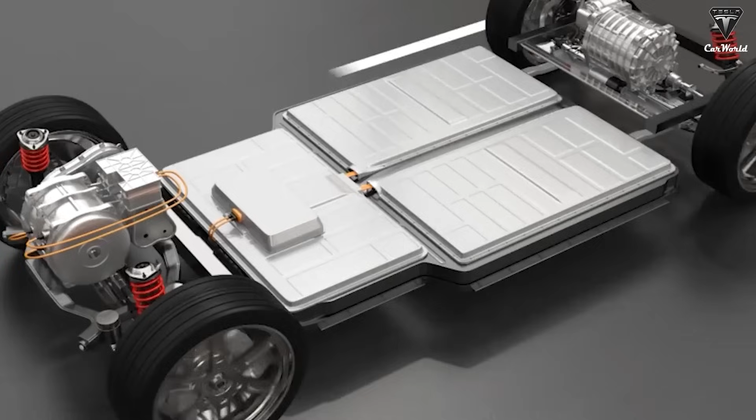While Toyota, Samsung, and Western giants quietly test their scaled-down battery technologies, Huawei has just played a wild card that sent shockwaves through the entire auto industry. A solid-state battery, potentially capable of delivering a jaw-dropping 1,968 miles, or 3,000 kilometers range for electric vehicles. This is no longer a competition between individual models or brands. This is a survival race.

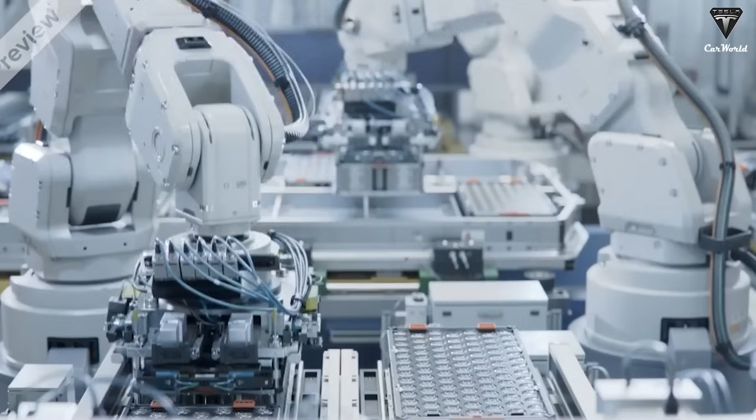If other automakers don't catch up with this technology within the next 2 to 3 years, they risk losing the market altogether. We're talking about batteries with twice the energy density of today's 4680 cells, a 5-minute charging capability, and a battery architecture that tackles the biggest flaw of solid-state tech: rapid degradation. And perhaps the most chilling part?

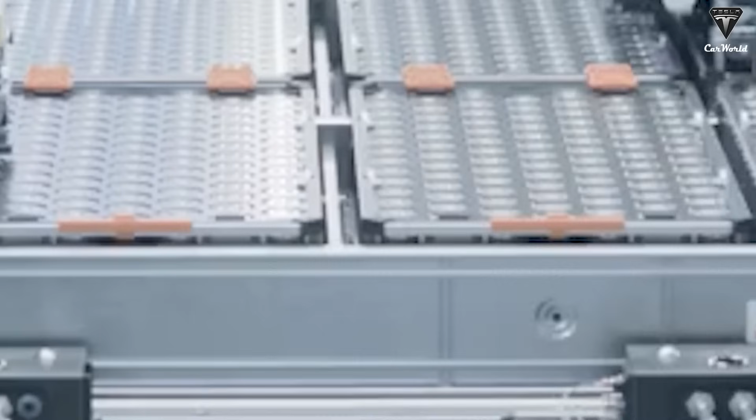Tesla is going all in on this front with a cold ambition, pushing past 1.3 million vehicles per year at its Shanghai Gigafactory. After all, Huawei is just one name among over 7,600 battery patents filed annually in China. And in the end, it's no longer about who leads on paper. It's about who can turn lab promises into mass production reality. The answer may well shape the entire future of transportation in the decade ahead, and you need to know about it now.

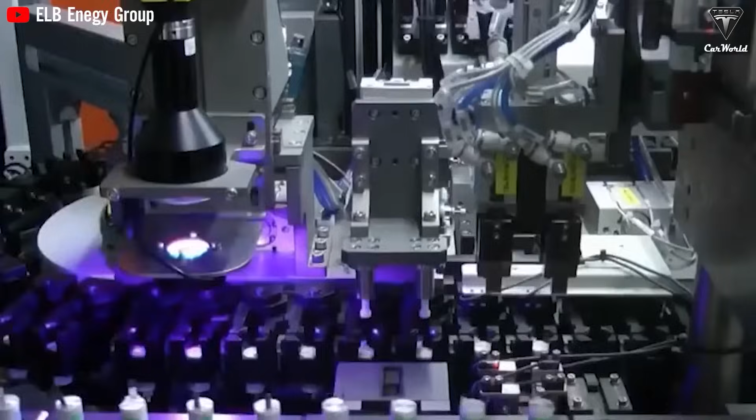How does a 1,968-mile battery truly lead the pack? Is it for real, or are they just blowing smoke? Let's be real, nobody saw this coming from Huawei. We mean, this is the phone company we all know, the one always in the headlines for clashing with Western governments. They're not a car maker, and they've never been a big name in EV batteries either. But out of nowhere, they drop a bombshell.

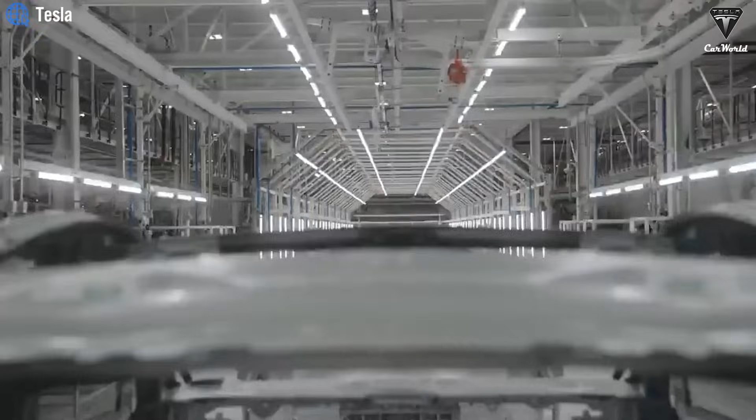A brand new solid-state battery with energy density hitting 500 watt-hour per kilogram. To put that into perspective, that's nearly double what you'd find in a current Tesla long-range model. And it's not just about cramming in more energy. Huawei claims they've tackled the biggest issue that's held solid-state batteries back for years: the rapid breakdown at the interface between lithium and the solid electrolyte.

Basically, most solid-state batteries degrade fast, especially at the point where the magic happens. But Huawei says they've fixed that by doping sulfide electrolytes with nitrogen. Sounds super technical, but the short version is, it works. If true, this could be the missing puzzle piece the whole industry has been looking for.

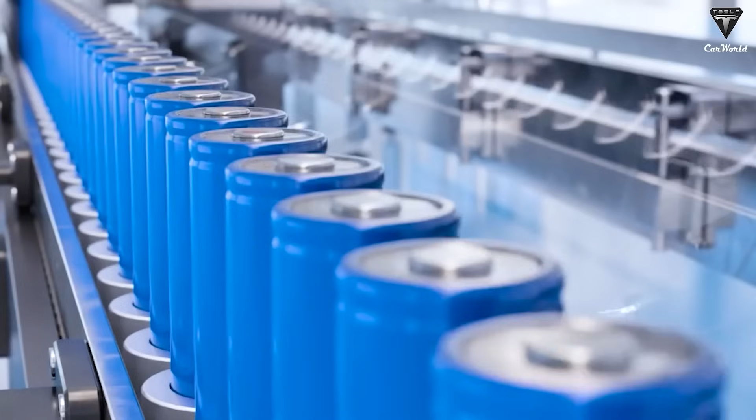Now, about that 3,000 kilometers range, or around 1,968 miles. Yeah, sounds kind of wild, right? Like, why would I need to drive from Los Angeles to Chicago without stopping? But that's not the point. The real value here is flexibility. Automakers could use this tech to either build smaller, lighter, more efficient EVs, or just keep the same battery size and give drivers 1,000 to 1,500 miles of real-world range.

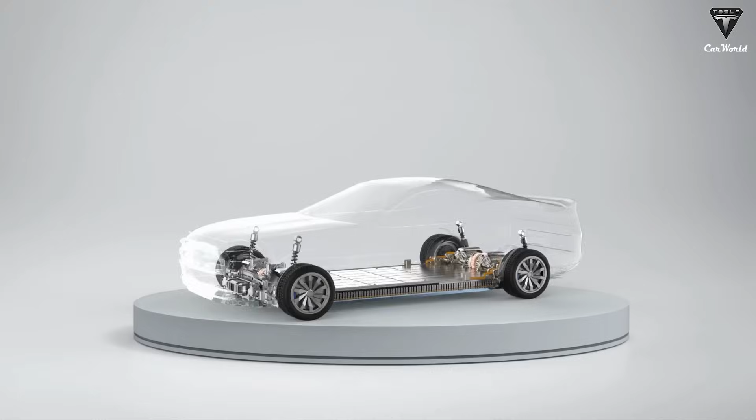Either way, that's bad news for gas engines, because suddenly EVs wouldn't just be cleaner. They'd be better in almost every way. Lighter, faster, longer range, cheaper to fuel. Game-changing stuff. Let's talk about charging for a second. One of the biggest gripes people still have with EVs is charging time. What if I forget to plug in overnight? What if I'm in a hurry? Well, that excuse is about to expire.

Companies like Zeekr, BYD, and XPeng are already testing batteries that can charge in just 5 minutes. Enough to give you around 300 miles of range. And no, this isn't just happening in China. Ultra-fast charging stations are being installed across Europe, the US, and even Australia. Before long, charging an EV will be like grabbing a cup of coffee. You pull over, take 5, and you're good for the next few hundred miles.

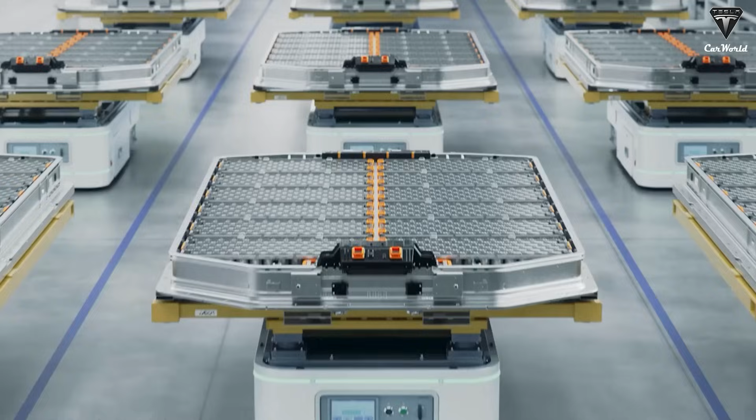Now let's not get ahead of ourselves. This tech still costs a pretty penny, up to $1,200 per kilowatt hour. That's about 20 times more than your typical LFP battery found in affordable EVs today. So yeah, early models using this battery will be high-end. Think luxury cars, supercars, or cutting-edge electric SUVs.

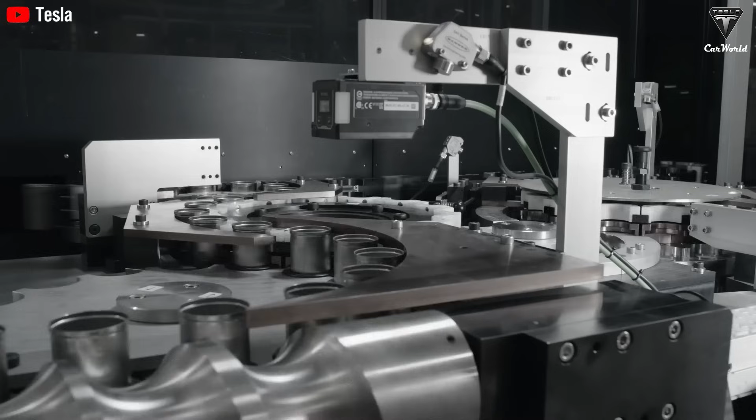But remember how OLED TVs used to cost an arm and a leg? Now you can grab one at Walmart during Black Friday. Solid-state batteries will likely follow that same curve. Premium today, mainstream tomorrow. So, is Huawei leading the pack, or are they just making a lot of noise? Honestly, it's too early to say.

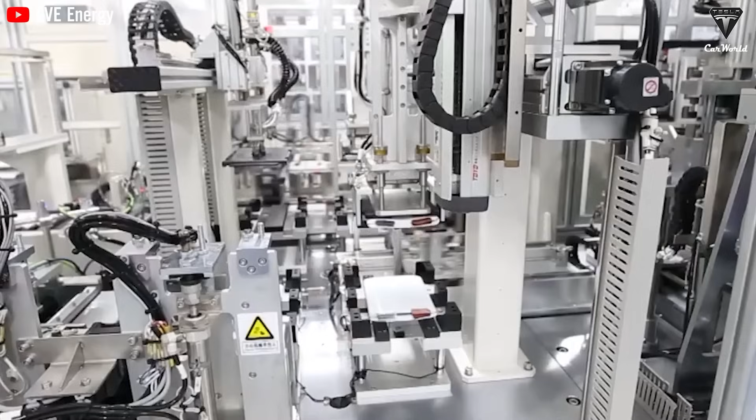They've filed patents and made bold claims, but there's no car in any dealership you can actually buy yet that uses this tech. Still, one thing's clear. Chinese tech giants aren't playing around. They've got the cash, the talent, and the motivation to shake up the EV world for real.

Meanwhile, over in Japan, Toyota promised back in 2021 that they'd have a solid-state EV ready soon. Well, it's 2025 now, and guess what? Still no sign of one hitting the lot. At this rate, it's starting to feel like waiting for Half-Life 3. Everyone says it's coming, but no one knows when. So yeah, Huawei jumping into the battery game might seem random at first, but when you look closer, it might be the start of a major shift.

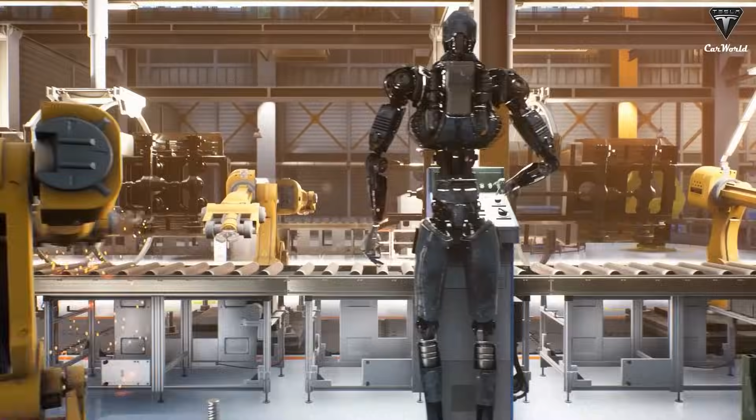Not led by the traditional car makers, but by tech companies with massive R&D budgets and a point to prove. And when companies like that get serious, well, the rest of the world better pay attention. So between solid and semi-solid battery: why Huawei's 1,968-mile battery could leapfrog 24M's tech.

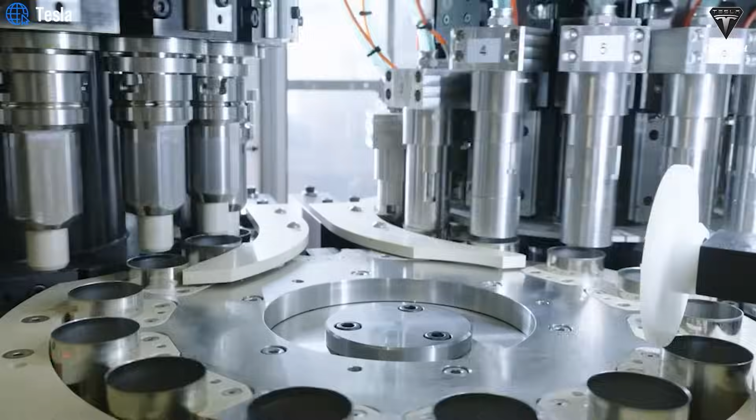In the fast-evolving world of electric vehicle technology, two disruptive battery technologies have emerged from opposite sides of the globe. On one hand, we have 24M Technologies, a US-based startup that stunned the battery world with its Eternalyte electrolyte, enabling rapid charging, outstanding cold weather endurance, and world-class safety features, all without resorting to solid state. On the other, we find a surprising new player in the EV battery game, Huawei, the Chinese tech titan better known for telecommunications than transportation.

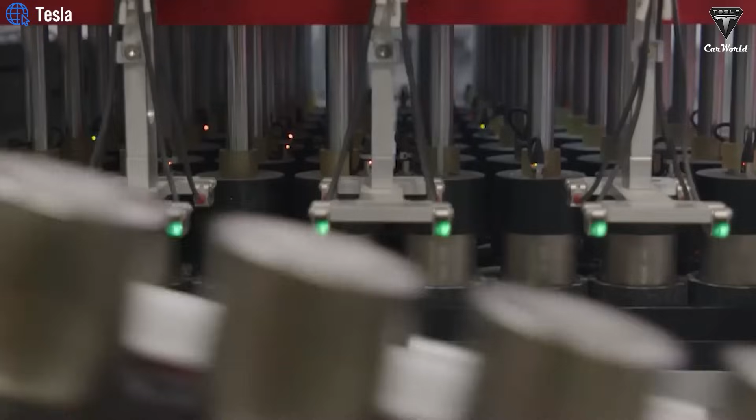Yet Huawei's recent announcement, a solid-state battery with an energy density of 500 watt-hour per kilogram, enough to power a car for up to 1,968 miles, may prove to be the more disruptive of the two. While both technologies represent remarkable engineering, Huawei's foray into solid-state power reveals deeper, potentially more transformative implications for the industry. It's not simply about high numbers, it's about redefining the physics and scalability of battery design in a way that could render today's EV limitations obsolete. Let's start with the raw numbers.

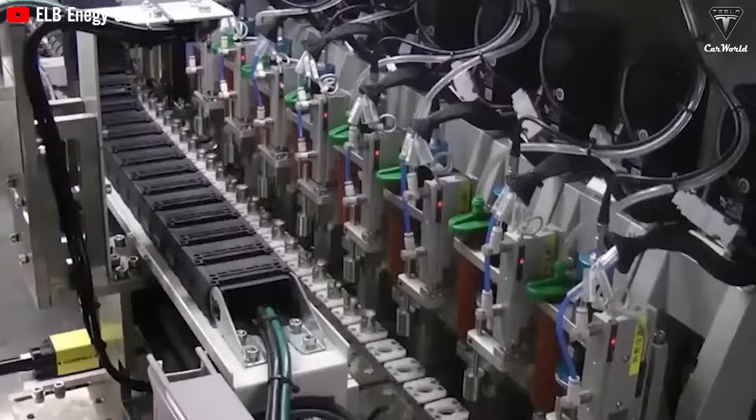24M's Eternalyte system, combined with their novel Impervio separator, reportedly achieves 660 watt-hour per kilogram, the highest energy density ever confirmed in a non-solid-state battery. This enables theoretical ranges of up to 1,000 miles, 1,600 kilometers, and fast charging times as short as 4 minutes for 300 kilometers. Huawei's technology, on paper, falls slightly behind in energy density, 500 watt-hour per kilogram. However, that's a misleading comparison if viewed in isolation.

Huawei's battery is fully solid-state, meaning the form factor allows for greater safety, packaging efficiency, and system integration. Solid-state batteries eliminate the need for bulky cooling systems and complex thermal controls, which means more of the car's weight and volume can be devoted to usable energy. Thus, while the per-kilogram energy metric favors 24M, the real-world system-level energy density, taking into account packaging, thermal management, and fire safety, very likely tilts the balance toward Huawei.

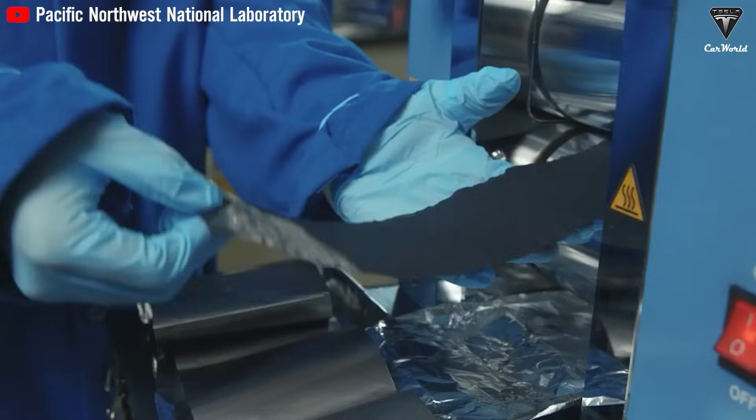Moreover, Huawei's innovation isn't just a speculative claim. They've filed a critical patent that outlines how they've overcome the long-standing Achilles heel of solid-state batteries: the rapid degradation at the interface between lithium metal and the solid electrolyte. By doping sulfide-based electrolytes with nitrogen, they reportedly stabilize the material interface and dramatically reduce the electrochemical decay that has long prevented solid-state batteries from achieving commercial viability. In doing so, Huawei appears to have crossed a scientific threshold that countless battery researchers have been chasing for over a decade.

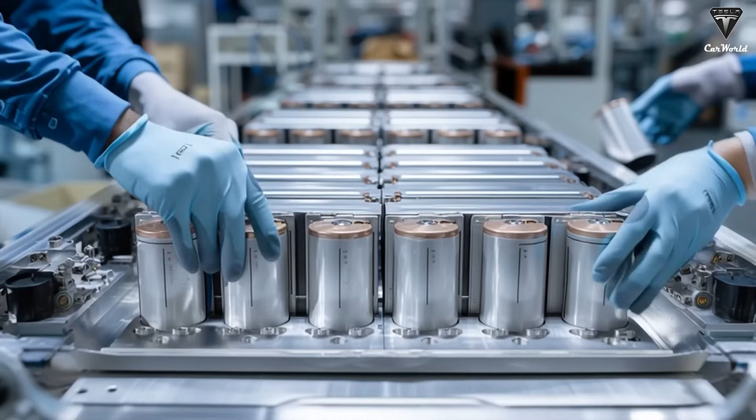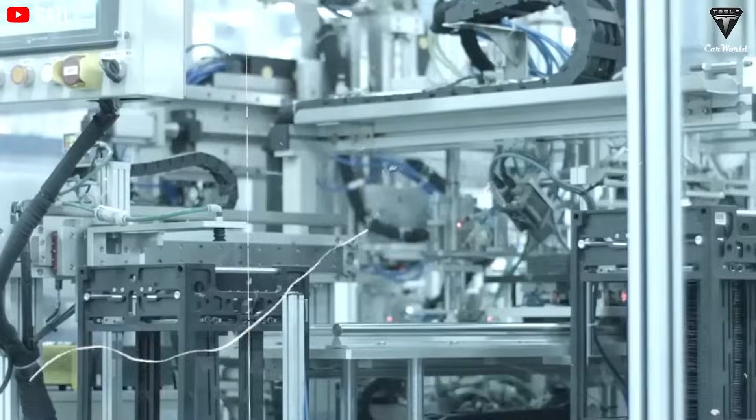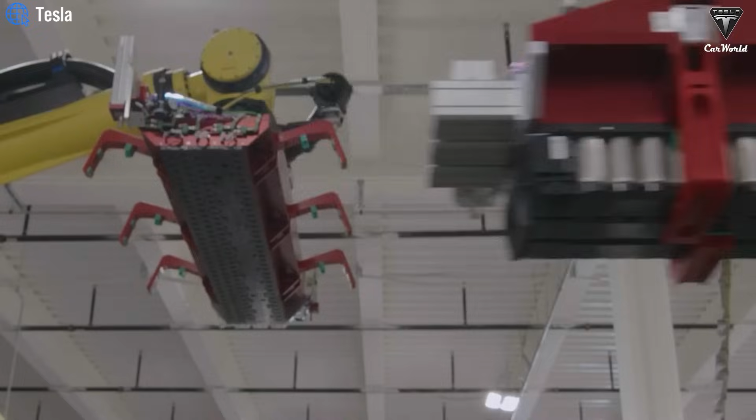No less important is the potential lifespan and degradation profile. While 24M's electrolyte dramatically improves lithium battery performance, especially in cold weather, it's still bound by the inherent constraints of liquid electrolytes, including issues like gradual capacity loss and dendrite formation over long charge cycles. In contrast, Huawei's solid-state approach minimizes dendrite risk, operates without flammable liquids, and can theoretically maintain capacity for thousands of cycles with far less degradation.

24M currently leads in charging speed metrics. The ability to deliver a 4-minute charge for 200 miles, 300 kilometers, without requiring ultra-high voltage infrastructure is a major practical benefit, especially in countries lacking dense EV charging grids. Their Eternalyte technology also sidesteps the need for 1-megawatt chargers, allowing 24M-equipped EVs to thrive even on standard 400 or 800-volt systems. Huawei has not yet released real-world data on charging speed, and it's possible that initial versions of their solid-state battery won't match 24M's blistering charge times.

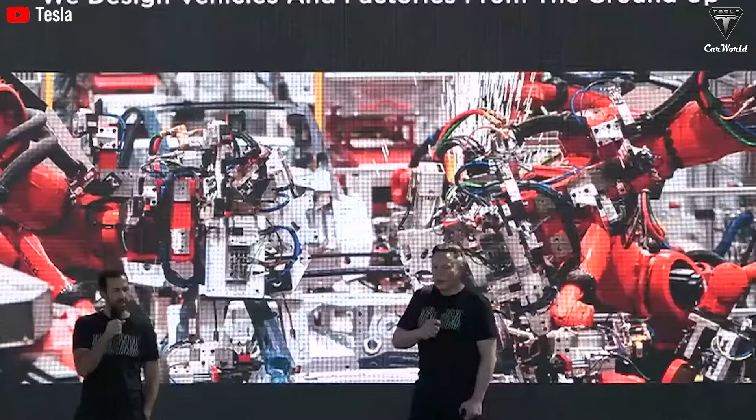However, this doesn't mean Huawei lags behind. Solid-state chemistry naturally lends itself to higher charging potential as thermal issues are minimized and voltage tolerances are higher. Once infrastructure and power electronics catch up, Huawei's batteries could charge at faster speeds without the need for elaborate liquid cooling systems. Moreover, the need for ultra-fast charging is arguably reduced by Huawei's energy reserve. If a car can drive 1,500 to 2,000 kilometers on a single charge, users may only need to recharge once every week or two, changing how we think about EV ownership entirely.

Safety is a critical concern in battery design, and here both companies deserve credit. 24M's Impervio separator offers state-of-the-art protection by suppressing dendrites and enabling early detection of internal shorts.

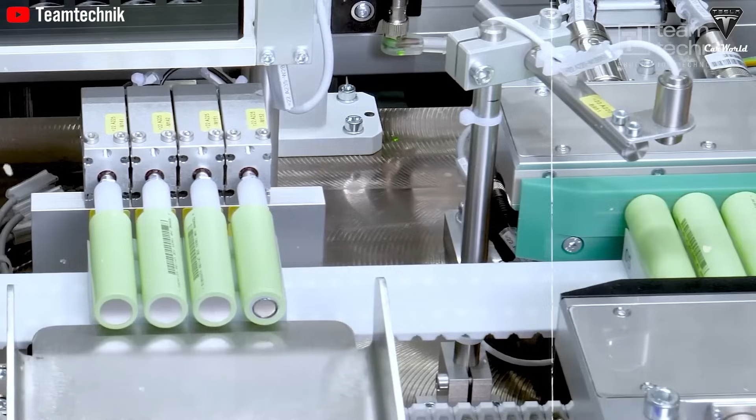Their battery platform maintains 80% capacity even at minus 40 degrees Celsius, a milestone unmatched by current lithium-ion solutions. This makes 24M's technology ideal for cold weather regions and contributes to the claim that their electrolyte might be the most robust non-solid-state platform ever built.

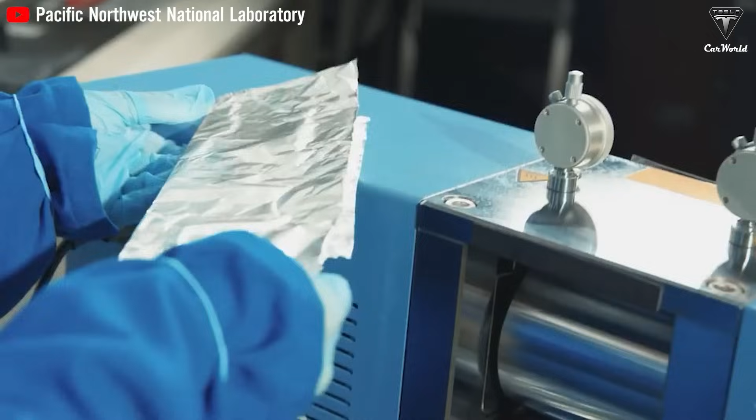Huawei's solid-state system, however, eliminates the core fire risks altogether. By using a non-flammable solid electrolyte, they bypass the possibility of thermal runaway, the primary cause of EV fires and recalls. While Impervio is a remarkable safety innovation for liquid batteries, solid-state remains inherently safer, offering a fundamentally fireproof architecture that regulators and automakers alike will increasingly demand.

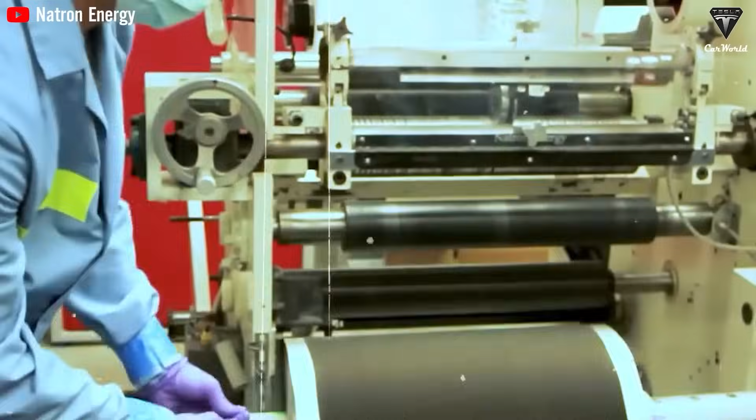24M's greatest strength is its scalability. Eternalyte and Impervio can be licensed and integrated into existing lithium-based battery production lines with minimal retooling. This lowers the barrier to adoption and offers an immediate pathway to market.

Huawei's approach, by contrast, is longer-term and more disruptive. Their battery is likely still in early prototype or lab-scale testing. Manufacturing solid-state batteries at scale remains a challenge, and cost per kilowatt-hour is currently estimated at 20 times that of LFP batteries. But as we've seen with screens, lithium-ion cells, and other technologies, costs drop rapidly once manufacturing matures.

The big picture here is that Huawei is not simply building a better battery. They are building a new battery paradigm. By investing heavily in material science, interface stability, and solid-state architecture, Huawei is setting the stage for the post-lithium era.

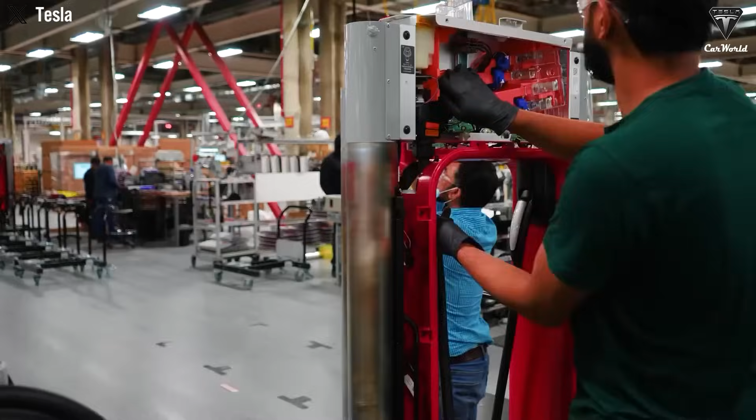24M's battery is, by many metrics, the best liquid-based battery system the world has ever seen. It is fast, cold-resistant, efficient, and safe, an ideal solution for the immediate future. But Huawei's battery hints at something bigger, a step beyond the boundaries of what we thought possible. With nearly 2,000 miles of range, non-flammable chemistry, and the potential for new vehicle design philosophies, Huawei may not just be improving EV batteries, they may be redefining what a battery-powered vehicle is.

How will these batteries impact Tesla affordability? Such a breakthrough aligns perfectly with mass-market vehicles. Take Tesla's rumored $25,000 Model 2 EV Gen 3. A solid-state battery like Huawei's would reduce cost, meet strict tax credit criteria, and unlock exceptional range, making it globally competitive even before subsidies. A 3,000 kilometers range would make the Model 2 a disruptive force in regions with poor charging infrastructure, especially Southeast Asia, Africa, and Latin America.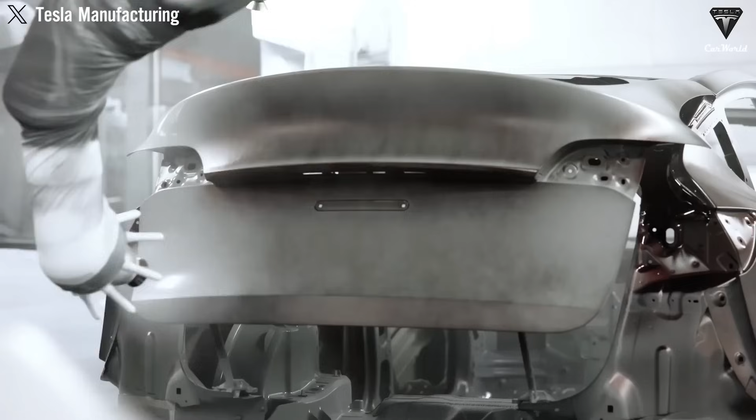Even if initial deployment is limited to premium models, the long-term strategy is clear. Replace lithium-based cells in entry-level EVs to meet cost and policy targets. This gives both Tesla and emerging automakers a blueprint for scaling sustainable, locally compliant vehicles without relying on vulnerable lithium supply chains.

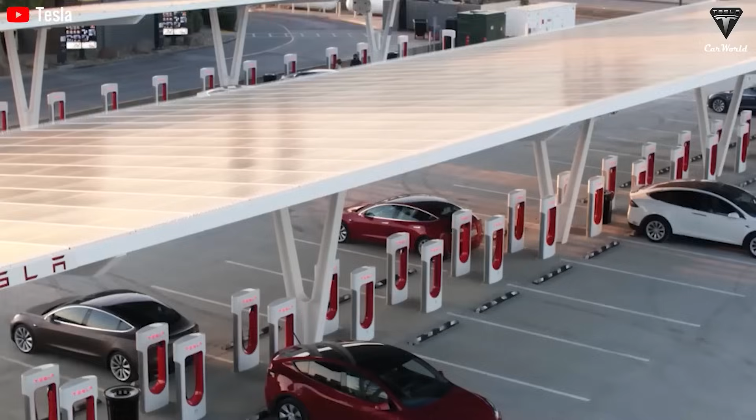Additionally, Huawei's battery could revolutionize stationary energy storage. With zero risk of thermal explosion, ultra-long cycle life, and efficient performance in cold climates, these cells could power everything from remote data centers to decentralized renewable grids, especially in places like Tibet, Scandinavia, or Alaska, where lithium storage suffers. The ability to discharge down to 0 volts without damage enhances flexibility for off-grid use.

From a manufacturing standpoint, Huawei's battery maintains partial compatibility with lithium-ion production lines. Retooling costs are estimated at only 10% over existing Li-ion factories, making the transition economically viable. This is key for gigafactory owners reluctant to overhaul infrastructure.

The core science behind the battery centers on solid electrolytes and advanced nanostructured electrodes. Unlike conventional graphite anodes, Huawei's model may use engineered ceramic or sulfide-based electrolytes paired with high-capacity metallic lithium or silicon anodes. These offer high ionic conductivity, thermal stability, and better interface contact, all key to delivering both fast charging and longevity.

Globally, this puts pressure on companies like Toyota, Samsung SDI, and QuantumScape, who have been researching solid-state batteries for years without commercial rollout. Huawei's unexpected leap forces these players to accelerate. Even Tesla, though silent, is rumored to be working on parallel architectures and has already registered several relevant patents.

Should we trust a tech company like Huawei to lead the EV battery revolution, or should car makers stick to what they know? Tech giants versus automakers.

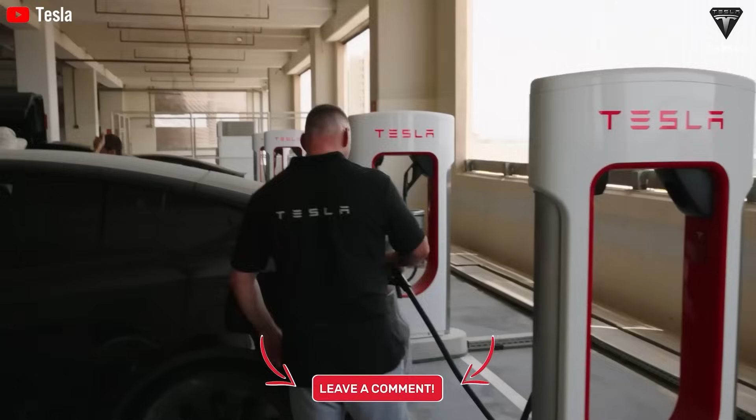The most critical component of an electric vehicle is the battery, but if it fails, you might have to replace the entire floor of the car. This isn't just a design weakness, it's a ticking time bomb for the future of EV.

Now imagine a battery lighter than ever before. One thin enough to cut a laptop's weight in half, slim enough to make phones as thin as a credit card, and powerful enough to boost an EV's range by up to 70%. And here's the kicker. It doesn't swell while charging, doesn't grow dendrites that cause short circuits, doesn't deform on impact, and doesn't degrade quickly over time.

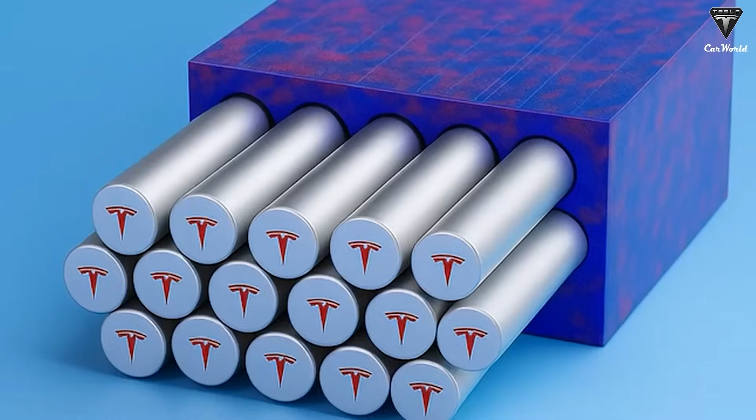The one at Korea Advanced Institute of Science and Technology, KAIST, which has developed a high-density structural battery made from a multifunctional carbon fiber composite. Their innovation lies not only in materials selection, carbon fiber for strength, and solid polymer electrolyte for ion conductivity, but also in the process of integrating those materials.

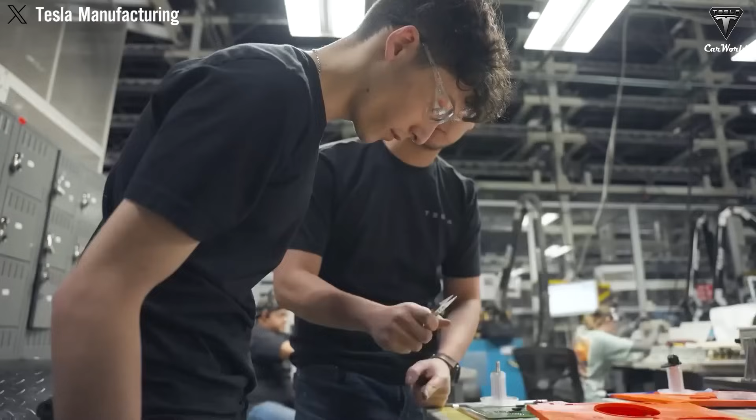Resin, a core component of the composite, typically traps air during curing, weakening both structural and electrochemical performance. To address this, KAIST employed vacuum compression molding, which tightly controls temperature and pressure during fabrication. The result? A cleaner, pure, minimal trapped air, and a composite that delivers both robust mechanical properties and battery-like functionality.

Their achievement is notable: a 160% increase in carbon fiber volume fraction compared to previous efforts, yielding a structure that is lighter, stronger, and capable of storing energy. This isn't a proof of concept on paper. It's a manufacturable design using well-understood industrial processes, meaning it could, in theory, be scaled.

Meanwhile, across the globe at Chalmers University of Technology in Sweden, researchers led by Leif Asp have been making quiet, steady progress with a different structural battery composite. Their design also uses carbon fiber composites, but with a twist. The carbon fibers serve dual purposes as both the structural support and the electrodes. A structural electrolyte completes the system, enabling ion flow through a material that's as stiff and lightweight as many metals.

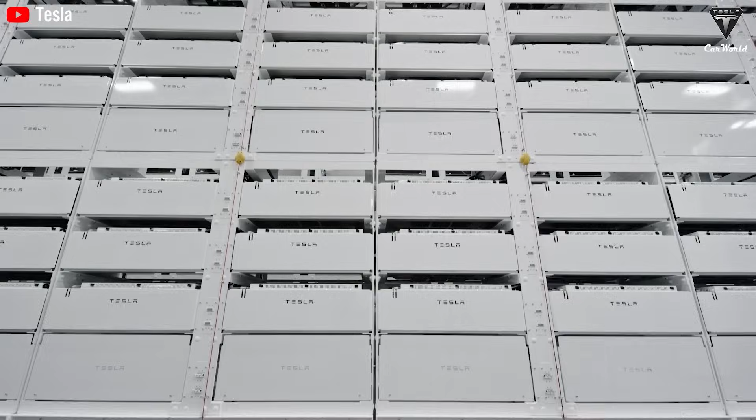According to early projections from the Chalmers team, structural batteries could cut a laptop's weight in half, reduce a smartphone's thickness to that of a credit card, or boost an EV's range by up to 70%. These are bold predictions, perhaps even optimistic, but they illustrate the transformative potential.

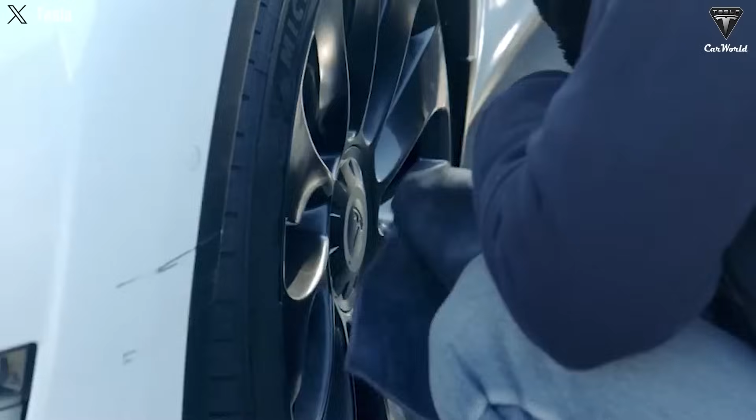Think of it like baking a classic pie, a flaky crust on the outside, a sweet or savory filling on the inside. Now imagine trying to make that pie tastier, lighter, and more nutritious. You'd naturally wonder, why should the crust exist only to keep everything in place? Why can't it be both sturdy and as nourishing as the filling itself?

Yes. By replacing both the chassis and the separate lithium-ion pack with a carbon fiber laminate that stores energy while carrying load, an average mid-size electric vehicle could drive roughly 70% farther on a single charge. Computer models show that today's 450 kilograms metal bodywork and 500 kilograms of standard cells can give way to a 30 watt-hours per kilogram structural pack weighing about 750 kilograms.

Yet the car still loses around 200 kilograms overall because the old chassis disappears altogether. Lower mass, coupled with the extra space freed inside the floor, translates directly into longer real-world range. The same material promises equally striking gains at smaller scales.

Prototype laptop housings built from the laminate deliver the stiffness of aluminum, about 70 GPa, while storing enough energy to eliminate the separate battery modules. Because the shell now doubles as the power source, Chalmers engineers calculate that a typical notebook's total mass could fall by roughly half without losing runtime.

For smartphones, the team has demonstrated single-sheet cells only 0.8 millimeters thick that function as the device's mid-frame. Tech Radar reported that this could enable handsets less than 4 millimeters deep, essentially the thickness of a credit card. Between the first 2021 prototype and the latest 2024 version, gravimetric energy density rose from 24 watt-hours per kilogram to 30 watt-hours per kilogram, while mechanical stiffness nearly tripled.

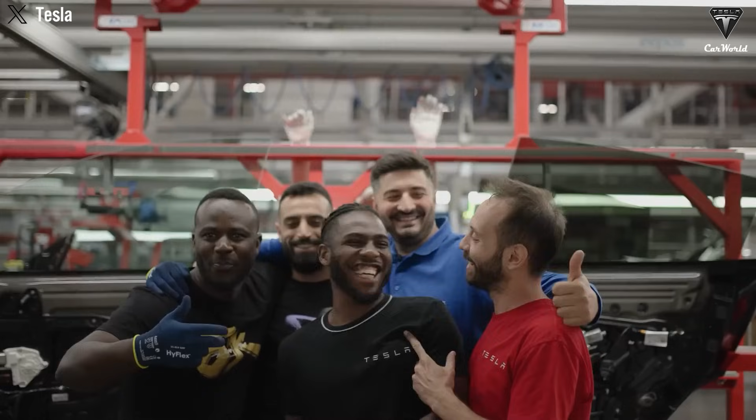When most people think about electric vehicles, they focus on things like range, charging time, and battery capacity. But what if the next big breakthrough in EVs wasn't about putting in a better battery, but rather about turning the entire car into a battery itself? That's the strange and exciting idea behind structural batteries, an innovation that could transform how we design vehicles from the ground up. Instead of simply improving the chemistry of batteries, structural batteries flip the concept entirely.

These are materials that serve both as structural components, like the body or frame of a car, and as energy storage. In other words, rather than having a battery inside, the car is the battery. This may sound futuristic, but companies like Tesla and BYD are already moving in that direction.

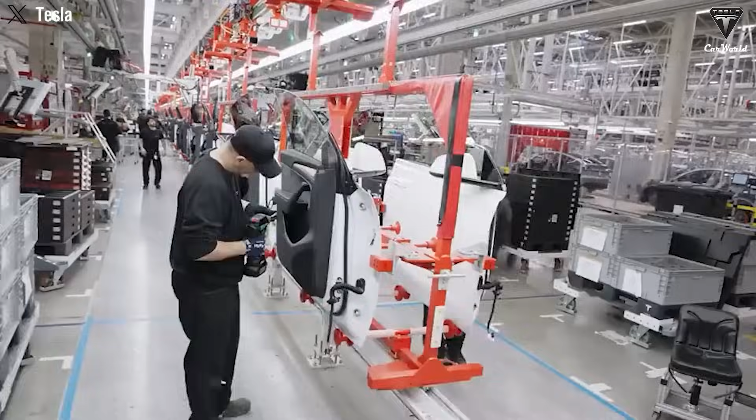Tesla has begun integrating battery packs as structural parts of its Model Y and Cybertruck, reducing the number of separate components and improving vehicle stiffness and efficiency. Meanwhile, research institutions and manufacturers around the world are racing to develop structural battery materials that are strong, lightweight, and capable of storing real amounts of energy.

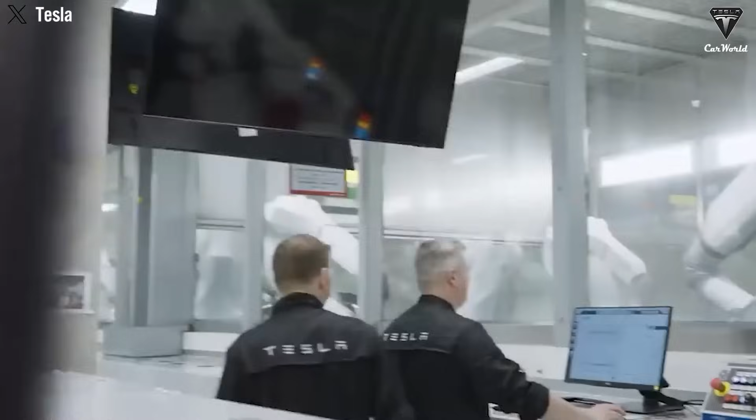So why are some of the most forward-thinking EV companies betting on structural batteries? The answer is a combination of performance, efficiency, and design flexibility. Today, EVs carry their battery packs in heavy, rigid containers placed low in the chassis. That adds weight and eats up valuable space. But with structural batteries, you get to eliminate the traditional chassis and the traditional battery enclosure, because they become the same thing. You might replace a 450 kilogram metal frame and a 500 kilogram battery pack with a single structural component that does both jobs and weighs significantly less overall.

The benefits go far beyond saving weight. Reducing mass makes EVs more efficient. Every kilogram saved means less energy needed to drive the same distance. Some computer models show that a well-designed structural battery could allow a mid-size EV to travel up to 70% farther on a single charge simply by cutting dead weight. Not only does this reduce the cost per mile, but it also opens up design possibilities that were previously off-limits due to bulky batteries and heavy structural components.

This is why automakers are so intrigued. If they can fuse two of the heaviest parts of a vehicle, the battery and the frame, into one, they don't just save weight. They free up internal space, improve driving dynamics, and potentially lower costs in the long term.

Some of the most promising progress has come from researchers working with carbon fiber composites. These materials are already known for being lightweight and incredibly strong, used in everything from sports cars to aircraft. But now, engineers are figuring out how to make carbon fiber composites store electricity. By embedding them with conductive materials and solid-state electrolytes, researchers have developed a carbon fiber-based structural battery with a significant boost in energy density and strength, thanks to clever resin chemistry and vacuum molding techniques. Their approach packs more carbon fiber into a tighter space while avoiding the air bubbles that weaken both structure and battery performance.

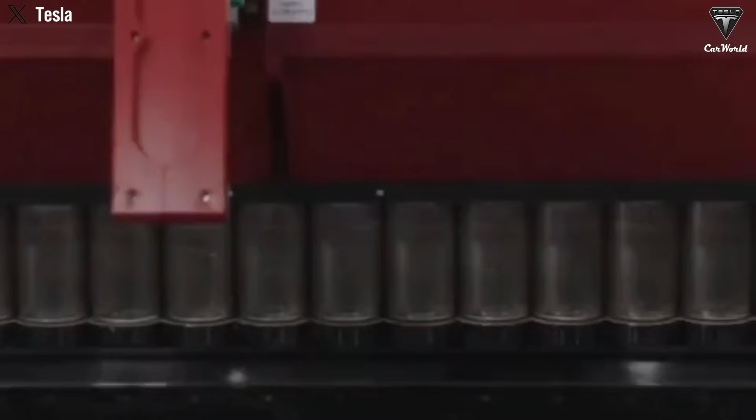In Sweden, researchers at Chalmers University have created a structural battery that uses carbon fiber not just for strength, but as both the electrodes and current collectors in the battery. Their latest version reached an energy density of 30 watt-hours per kilogram. That's still a fraction of traditional lithium-ion batteries, but it's a major leap from earlier prototypes. According to their estimates, such batteries could eventually cut a laptop's weight in half, allow smartphones as thin as a credit card, or even significantly increase the range of an EV.

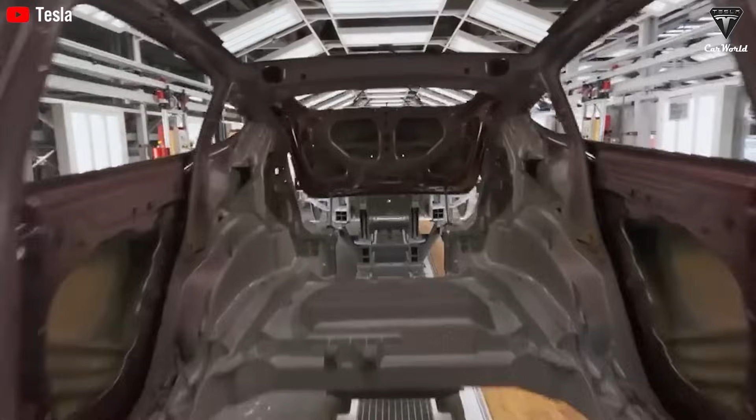Of course, this is not to say that structural batteries are ready to replace traditional batteries across the board. They still have significant hurdles. The biggest challenge is energy density. Structural batteries simply can't store as much energy per kilogram as today's high-end lithium packs. For now, they are less suited for applications where maximum range and compact size are non-negotiable.

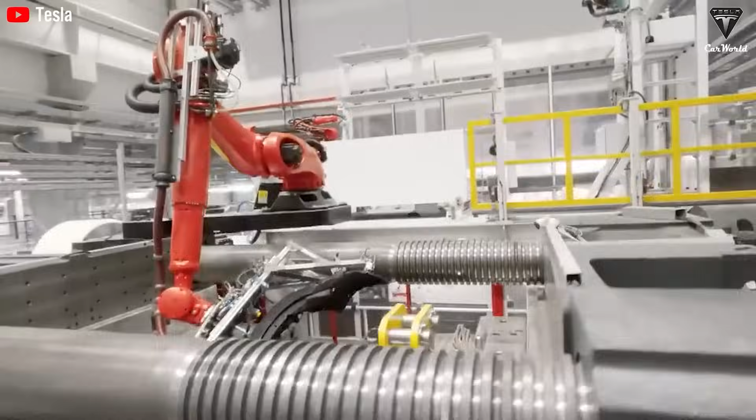But in many other use cases, particularly where space and weight savings are just as important as battery life, structural batteries show immense promise. Aircraft designers, for example, are deeply interested in them. Planes are extremely weight-sensitive, and every pound saved extends range or increases payload capacity. Some research groups are already building lightweight structural supercapacitors into fuselages and wings, demonstrating that these ideas aren't just theoretical.

Another major factor driving this innovation is sustainability. Structural batteries are expected to use fewer raw materials by replacing multiple components with a single multifunctional one. This could lead to simplified manufacturing, fewer emissions during production, and better recyclability, especially as composite materials and solid electrolytes improve. Unlike many other next-gen battery technologies still stuck in the lab, structural batteries are already being integrated into real products, at least in limited ways. Tesla's battery-integrated chassis is arguably the first step toward this future, and it shows how structural energy storage can already help reduce complexity in production and improve vehicle performance.

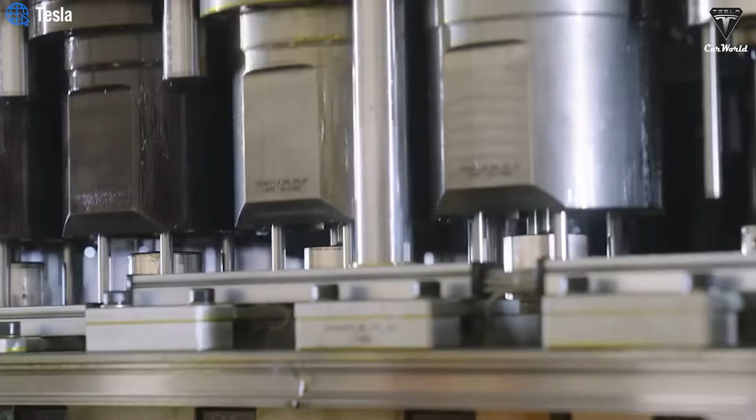Still, this technology is far from mature. For full structural battery adoption, manufacturers will need to solve issues related to safety, such as swelling and deformation during charging, and long-term durability. In traditional batteries, these issues are isolated. But if your car's frame is also your power source, any physical damage becomes a much bigger problem.

There's also the economic factor. Right now, structural batteries are expensive and difficult to mass produce. Capacity, materials, vacuum forming, and precise layering don't come cheap. Like with many new technologies, structural batteries won't reach cost competitiveness until they can scale up, and scaling up requires big investment, strong partnerships, and a fair amount of risk-taking. Yet, despite these obstacles, the industry's interest is growing, and the more real-world applications we see, the faster the pace of innovation. With structural batteries, companies aren't just asking, how can we make a better battery?

They're asking, why does a battery need to be a separate thing at all? That's the kind of thinking that drives real disruption. So why are EV companies betting against traditional lithium battery design? Because structural batteries offer an opportunity to break free from the compromises we've lived with for decades. Instead of being limited by where the battery fits, how heavy it is, or how hot it runs, structural batteries offer a way to build the battery into the bones of the vehicle itself.

That's a powerful idea. Lithium-ion batteries aren't going anywhere soon. They're still the best option for most consumer electronics and long-range EVs. But the shift to structural batteries suggests that a new layer of innovation is unfolding, one that changes not just how batteries work, but what they are. The next generation of EVs might not carry their batteries. They might be built from them.

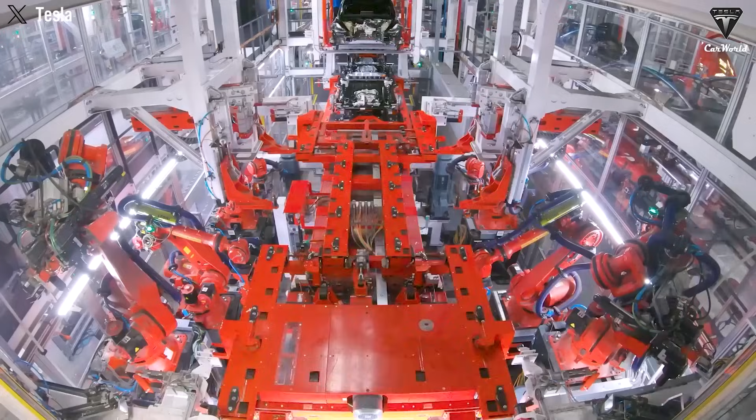How are structural batteries being tested on EVs? Those longevity claims may sound fantastical, yet they track with numbers already measured in accelerated aging chambers. A recent peer-reviewed trial at the Materials Performance Institute cycled a 400mm structural panel more than 3,500 times at 95% depth of discharge while subjecting it to alternating tensile loads that mimic pothole strikes. At the end of the test, capacity had fallen by only 15%, a figure usually reached by standard nickel-manganese-cobalt packs after just 1,000 deep cycles and almost no mechanical abuse.

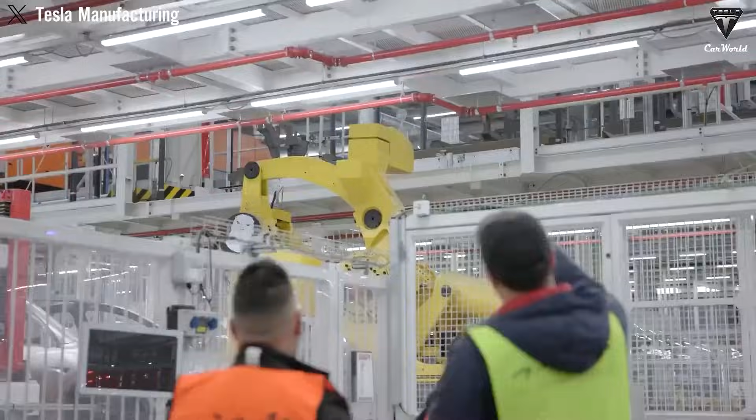That performance stems from two intertwined breakthroughs: a semi-solid polymer electrolyte that heals micro-cracks as they form, and a nano-textured carbon fiber weave that spreads strain so evenly the active layers behave more like a rubber sheet than a brittle ceramic. The payoffs extend far beyond raw durability.

In a mid-size crossover, think of something between a Tesla Model Y and a Toyota RAV4, the conventional chassis panels weigh about 420 kilograms, while a separate 82 kilowatt-hour battery pack adds another 510 kilograms. Structural powertrain engineers aim to replace both assemblies with an integrated 100 kilowatt-hour tub weighing 650 kilograms. Although that looks heavier at first glance, the deletion of stamped steel, cast aluminum, and multi-part crash rails leaves the overall vehicle 280 kilograms lighter.

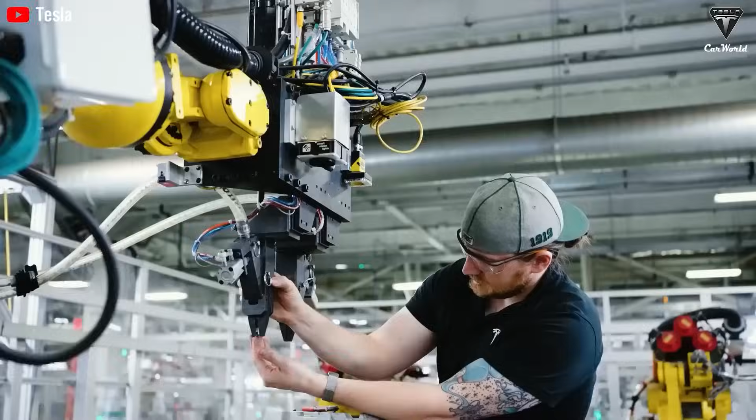To push those range gains even higher, researchers are changing the chemistry that lives inside the carbon shell. Instead of the traditional cobalt-heavy blends popularized over the last decade, several groups are experimenting with high-nickel, low-cobalt spinel cathodes stabilized by aluminum doping. These materials offer 260 watt-hours per kilogram at the cell level, only 10% shy of the best pouch cells shipping today, yet they tolerate far greater compressive stress because the three-dimensional spinel lattice resists the volume swings that typically fracture cathode layers.

On the anode side, the go-to recipe mixes silicon nanotubes with a thin surface grafting of lithium phosphorus oxynitride, a coating that locks silicon in place during expansion so it cannot pulverize or form conductive dead ends. When that anode is impregnated directly into the carbon fiber filaments, electron pathways shorten by more than half, cutting internal resistance to a level where 5 to 80% charging in 12 minutes becomes plausible at 350 kilowatt roadside stations.

Cold weather resilience, the Achilles heel of nearly every electric powertrain sold today, benefits just as dramatically. Standard graphite electrodes slow to a crawl below freezing because the electrolyte thickens and the intercalation process grows sluggish. The polymer electrolyte in structural batteries, by contrast, transitions into a slightly rubbery state at -15 degrees Celsius, yet retains ion mobility on par with liquid carbonate solutions at room temperature.

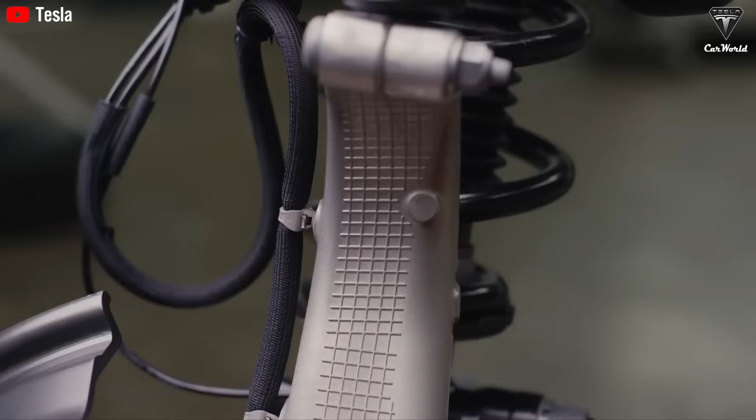If your EV's chassis and battery could be combined into one ultralight, super-strong structure, would you feel more confident about driving it, or more nervous knowing the entire car is the battery?

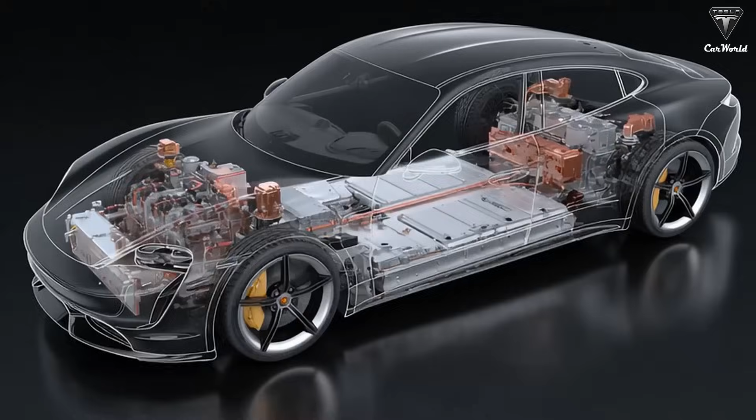It's great to see US companies finally taking action to push the battery industry to the next level. We all know the truth. Batteries have long been the weakest link in the electric vehicle world. Not the design, not the range, but the cost of manufacturing and replacing them. Ask any car salesperson, and they'll likely dodge the question. Why? Because no one has managed to bring battery replacement costs down to a level consumers can afford.

But now, the 24M semi-solid-state battery claims to do just that, thanks to its simplified design with semi-solid-state cells, fewer components, and sandwich-style assembly. The result? Lower fire risk, easier recycling, a remarkably low cost of just 6 cents per watt-hour, and the ability to fully charge in just 4 minutes.

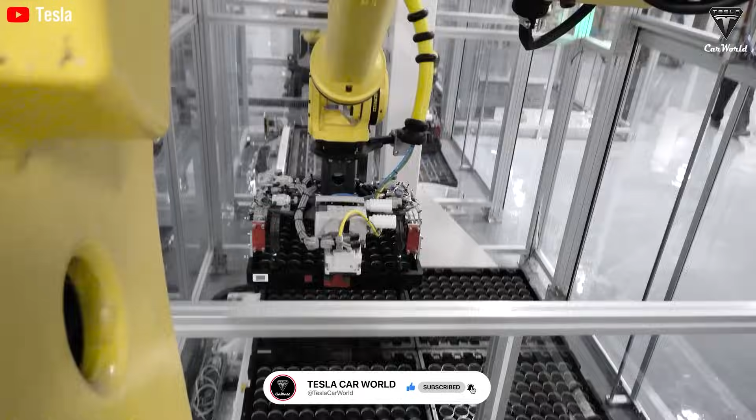But the lab is easy to talk about. Mass production is the real test. Charge-discharge cycles must be validated with real-world data, and few manufacturers are willing to openly discuss battery degradation. But if 24M can prove its durability, US electric vehicles may finally break free from dependence on Asian battery suppliers, and budget-friendly models like the $11,800 BYD Seagull or the $24,400 XPeng G6 long range will never be a threat to the American EV market. Could this finally be the tipping point for the US to lead in battery manufacturing?

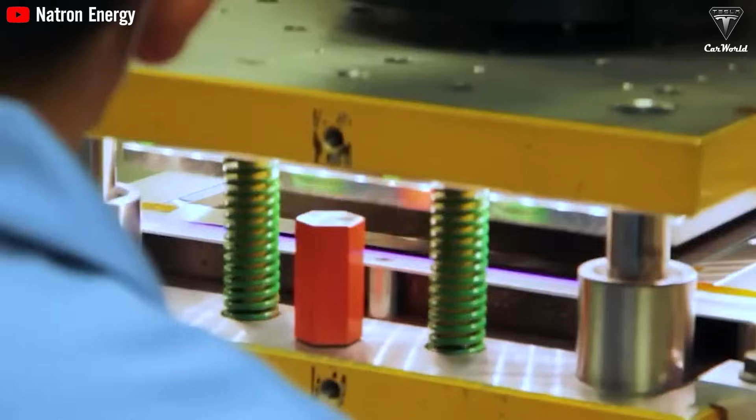Today we're taking a closer look at the semi-solid-state lithium-ion battery technology developed by 24M. 24M, short for 24 Molecules, is a battery technology firm headquartered in Cambridge, Massachusetts, USA. They've distinguished themselves with a unique semi-solid platform engineered to tackle the 4 biggest challenges in the battery industry: driving down costs, boosting safety, increasing energy density, and maximizing recyclability. So how does 24M's semi-solid battery turn the 6 cents per watt-hour price into reality?

This $0.06 per watt-hour claim is universally regarded as an extremely dubious assertion, lacking rigorous scientific evidence, a solid verifiable foundation, or validation. Any basic market observer also knows that current lithium-ion battery pack prices sit at approximately $115 per kilowatt-hour, meaning $0.115 per watt-hour. So a $0.06 per watt-hour headline rate implies a massive 48% discount over the already optimized current costs, a proposition that remains entirely questionable, implausible, and unfeasible with today's global battery manufacturing technology at scale.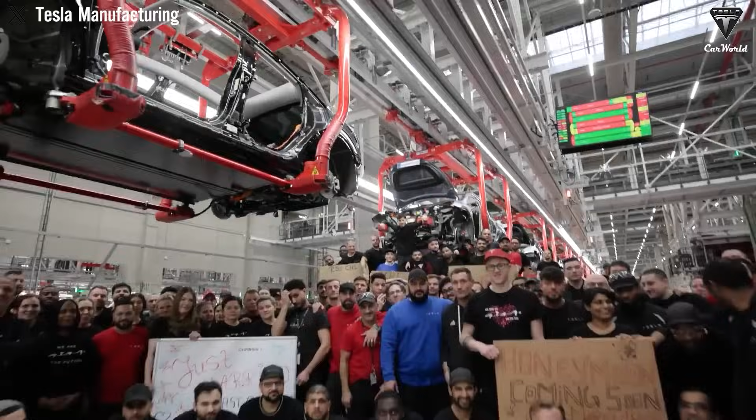Even leading battery scientists and seasoned market research experts in their most optimistic projections only anticipate that average global battery pack prices will gradually decline to below $100 per kilowatt-hour by the year 2025. So where does the $0.06 per watt-hour figure come from? And why is 24M's battery able to accomplish this feat?

Remember back at Battery Day 2020. Elon Musk and Tesla consistently pursued dramatic cost reduction and significantly enhanced battery performance, publicly targeting an ambitious $60 per kilowatt-hour goal at Battery Day 2020. And just 5 years later, that ambitious goal has fully materialized in published data, and we believe this extremely low price point derives from large-scale research experiments, because realistically it would be nearly impossible to achieve at an internal or pilot production scale.

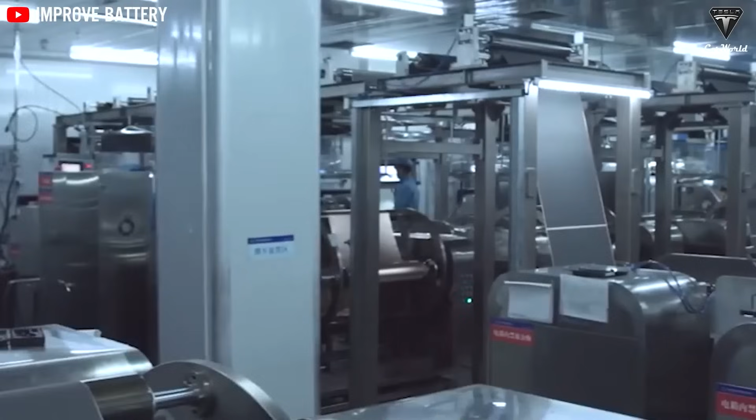Imagine a battery factory as a construction site where, instead of laying 20 painstaking rows of tiny bricks and mortar, workers now install a few massive precast panels that raise the full height of the wall in a single lift. That is essentially what 24M's semi-solid process does. It cuts the number of individual placements in half, wiping away hours of labor and slashing the energy bills that normally keep the lights, ovens, and precision robots humming. Because each panel is poured as one dense slab, it ends up twice as thick as a traditional brick layer, so the same concrete footing supports far more material. Pay for the foundation once, carry double the load, and the cost per square foot, or per watt-hour, plummets.

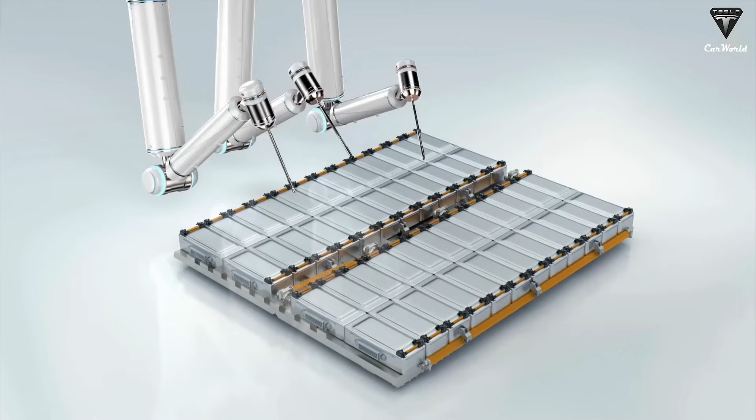The advantage compounds inside the car itself. Where a typical electric SUV hides hundreds of brick-sized cells under the floor, 24M replaces that clutter with half a dozen wall-sized sheets, the company's so-called carpet cells. Fewer parts mean fewer welds, wires, screws, and cooling plates, which quietly chip 10 to 15% off the final bill while also removing dozens of potential failure points.

The streamlined approach even reshapes the factory. With less real estate and equipment to finance, the company can build a plant for roughly half the cost, then pass the savings straight to automakers. This battery can run iron-based LFP powders, high nickel blends, or even future sodium chemistries without ripping out its tooling. That agility shields pack prices from wild swings in metal markets, and it shows up where it matters most.

A 75 kilowatt-hour battery that costs about $8,600 today could fall to roughly $4,500. Couple that drop with a $7,500 federal credit, and a mid-size electric crossover can undercut a gasoline SUV right on the showroom floor. Because the panels are cast in Massachusetts, the pack also clears new rules that penalize Chinese components, so more models stay eligible for incentives.

Best of all, the same design that makes the battery cheap lets it add 200 miles of range in 4 minutes and keep working in -40-degree winters. So, how can they prove that a 4-minute charging time isn't just hype? It's an undeniable fact that even the most advanced semi-solid state batteries on the market today can only charge from 15% to 90% in up to 18 minutes.

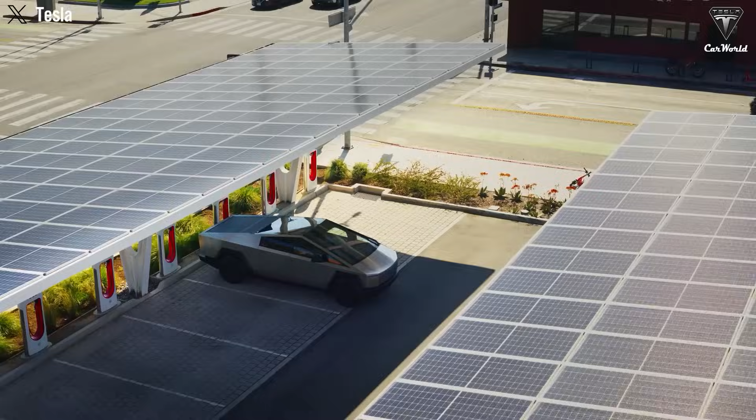Unlike traditional lithium-ion batteries or even solid-state designs, these batteries use a proprietary electrolyte known as Eternalyte. While the company is understandably secretive about the details, after all, revealing too much could mean handing the keys to competitors, what's publicly known is already jaw-dropping. Eternalyte has 3 times the ionic conductivity of standard electrolytes. That means ions, the tiny charge carriers that flow between the anode and cathode, can move way faster,

resulting in dramatically shorter charging times. According to internal testing, 24M cells can add 200 miles of range in under 4 minutes, and they don't require exotic hardware to do it. Unlike other fast-charging batteries that rely on 1 megawatt ultra-high-power chargers, which are expensive, rare, and often require special infrastructure, 24M's battery charges just fine on standard 400-volt and 800-volt platforms. That means no major overhauls to the grid, no custom cooling systems, just plug in and go. That alone is revolutionary. But it gets even better.

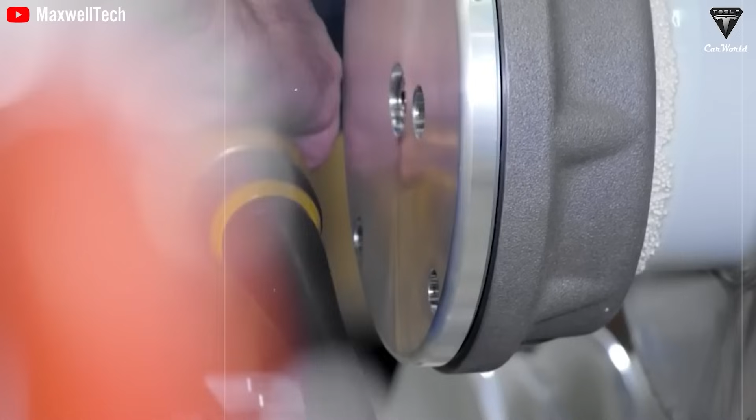Thanks to the Eternalyte electrolyte, 24M's batteries perform incredibly well in cold environments, one of the Achilles heels of most lithium batteries. Standard lithium-ion cells lose 25 to 30% of their capacity at 0 degrees Celsius and perform terribly at minus 20 degrees Celsius. But Eternalyte keeps on going. In testing at minus 40 degrees Celsius, 24M cells maintained over 80% of their capacity and full energy transfer. That's virtually unheard of, and it makes these batteries perfect for cold weather markets like Canada, Northern Europe, or even military operations.

Think about how we refuel gasoline cars. A typical gas stop takes about 5 minutes. Until now, EVs just couldn't compete with that. You had to plan your routes around charger availability and wait times. But with this tech, the EV charging experience becomes just as fast and convenient as gas, maybe even faster.

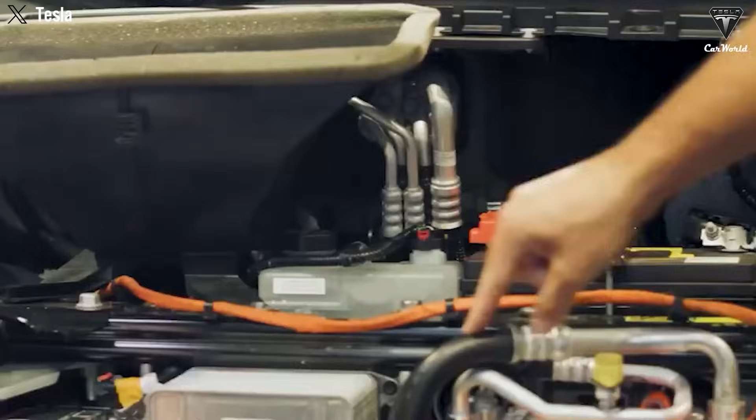More exciting, this performance doesn't come at the expense of cost or safety. In fact, the fast charging capability is a direct result of the chemistry, not brute force. Eternalyte enables high current flow without overheating, and it pairs with 24M's proprietary Impervio separator to prevent the risk of thermal runaway. This means faster charging without the fire hazard that often plagues high-speed charging designs. By eliminating the traditional bottlenecks of charging time and cold weather performance, 24M is knocking down 2 of the biggest walls blocking widespread EV adoption. And the fact that this can be done without exotic infrastructure means the path to mass deployment is wide open.

So, why can it kill China's LFP technology? We must acknowledge that China currently controls more than 80% of global LFP battery production. At the same time, LFP batteries accounted for 82.8% of all battery installations in China in April 2025, and CATL and BYD remain the industry giants, holding 38% and 17.2% of the worldwide market, respectively.

Besides, we've probably heard all the buzz around solid-state batteries, how they're the next big thing, promising higher energy density, better safety, and longer lifespan. But they also come with sky-high costs, slow manufacturing ramp-ups, and persistent issues with degradation. Rather than go down the solid-state route, 24M has developed something entirely different: semi-solid lithium-ion batteries.

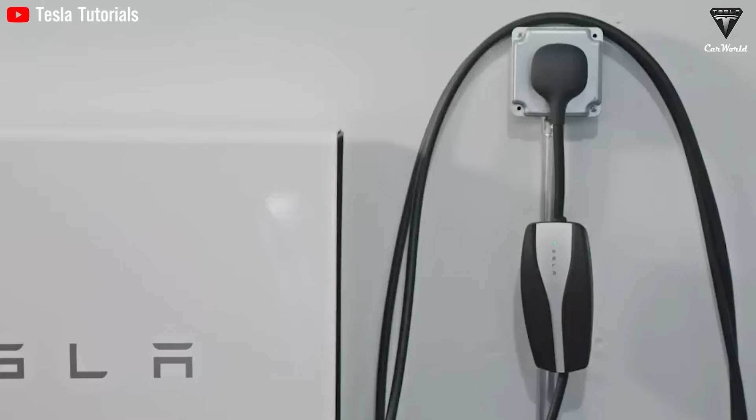Because the electrodes are free from binders and formed in thick cast layers, they can be mechanically separated at end of life. No fire, no acid baths, no black mass. This allows for up to 98% material recovery, all through a clean and scalable process. It's a true step toward a closed-loop battery economy. Easier thermal management: it's simpler, safer, and reduces system costs by an estimated 30% per kilowatt-hour.

Even better, it scales. Manufacturing is already semi-automated and production-ready, paving the way for rapid adoption. And it's made in America, ready to challenge not just the limits of what's possible, but also the global supply chain that's long held the EV industry hostage.

What do Elon Musk and Tesla say about this semi-solid-state battery? With all the standout advantages discussed, ranging from higher energy density and improved safety to scalable, cost-effective manufacturing, it's no surprise that semi-solid-state batteries are starting to attract attention from major players in the EV industry. But what about Tesla and Elon Musk, the names synonymous with cutting-edge innovation? What do they have to say about semi-solid-state batteries? And more importantly, have they started using them?

Surprisingly, Elon Musk has never publicly endorsed semi-solid-state batteries the way he's hyped solid-state batteries in the past. In Tesla's Battery Day presentations and recent investor briefings, the focus remains on the company's 4680 battery cells, a next-gen version of traditional lithium-ion technology. There's been no official mention of semi-solid-state batteries as part of Tesla's core development strategy.

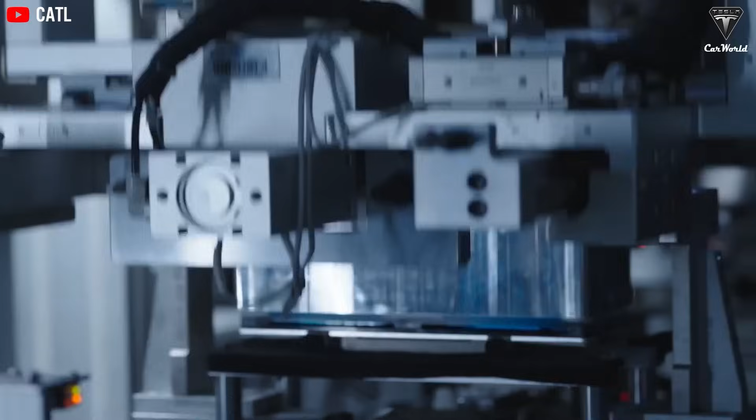Elon Musk once famously said, "Solid-state batteries sound great, but they're insanely hard to manufacture at scale. That's why we're focused on tech we can build now." While he wasn't referring directly to semi-solid batteries, his words inadvertently support the semi-solid approach, which bridges the gap between current-gen lithium-ion and fully solid-state designs. It's safer, more flexible, and far more viable for mass adoption.

Some industry analysts believe that in the coming years, as Tesla maxes out the potential of the 4680 and the pressure to improve weight, range, and energy density intensifies, they'll be forced to revisit semi-solid-state batteries as a logical next step. So, while Tesla hasn't made a move yet, one thing's clear: Elon Musk is watching. And with the current pace of innovation, it wouldn't be surprising if Tesla suddenly announced a future Model 3 or next-gen roadster powered by semi-solid batteries, built on a quiet partnership already in the works.